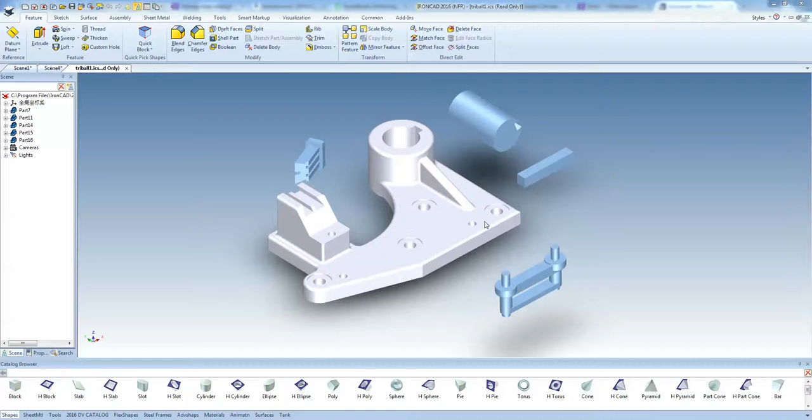In this short video example, we're going to demonstrate how to use the TriBall to align components. On our first part, we'll go ahead and left click once and use F10 to activate the TriBall. You can see that the TriBall is located in the center of the cylinder.

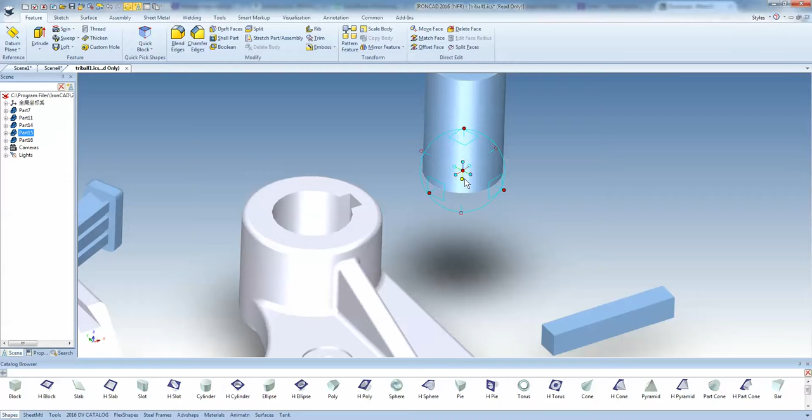A couple different options that we have. By left click and holding and snapping to an axis, I can automatically align to an axis. Now holding down the shift key, I can left hold and drag and snap to the center of that cylinder, and you can see we align right with the center of the cylinder.

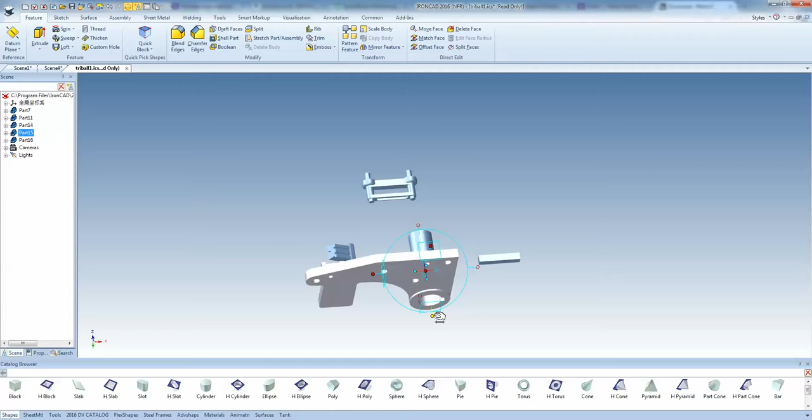Again, by left hold and drag, I can left hold and drag the center of the TriBall inside handle. I can snap to the midpoint of the edge and quickly align the two slots. Again, to align the bottom, I can very quickly just left click that axis, left click, hold and drag, snap to that face, and we've aligned the face of the cylinder with the bottom.

Now for our key stock, we can go ahead left click once, F10 to activate the TriBall. Likewise, the inside handle, which is aligned with the orientation of the key stock, I can left hold and drag, snap to the axis of the cylinder and align quickly with the axis of the cylinder.

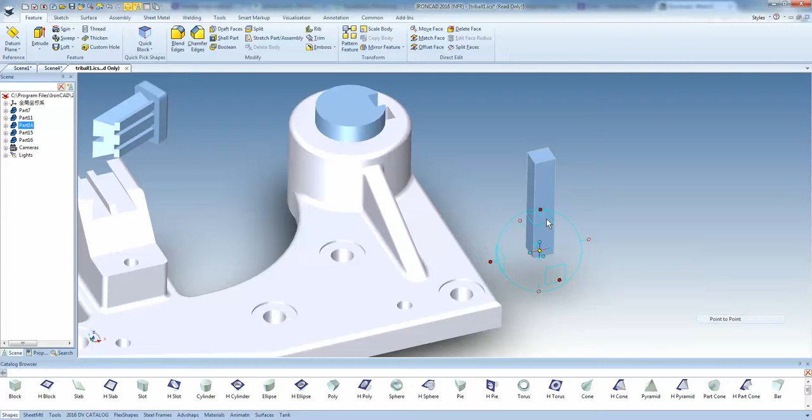Now by right clicking inside the TriBall, I can right click and go to midpoint, point to point. I can click the midpoint of those two midpoint edges there, left click that axis, left click and drag, and again I'm lined up with the bottom of my part.

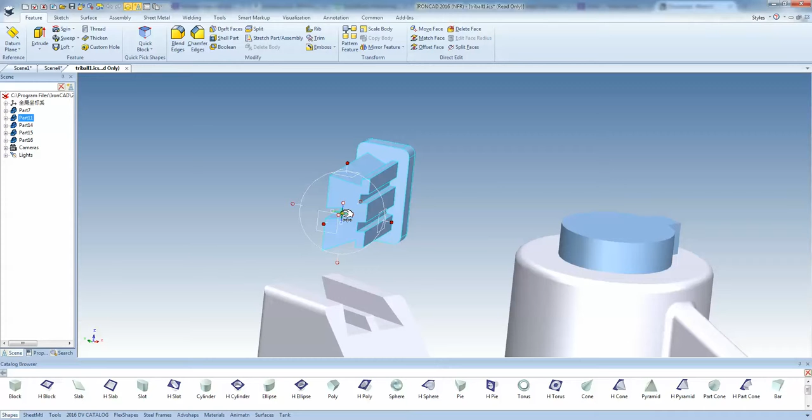On this piece here, we can go ahead and click it, F10 to activate the TriBall. What I want to do in this case is I want to reposition the TriBall. So by hitting the space bar, my TriBall turns white so I can reposition. I'm going to left click and drag to the midpoint of this edge here, hit my space bar one more time, left click and drag to that midpoint, and by grabbing the inside handle, snapping to that face, I can align to the face there.

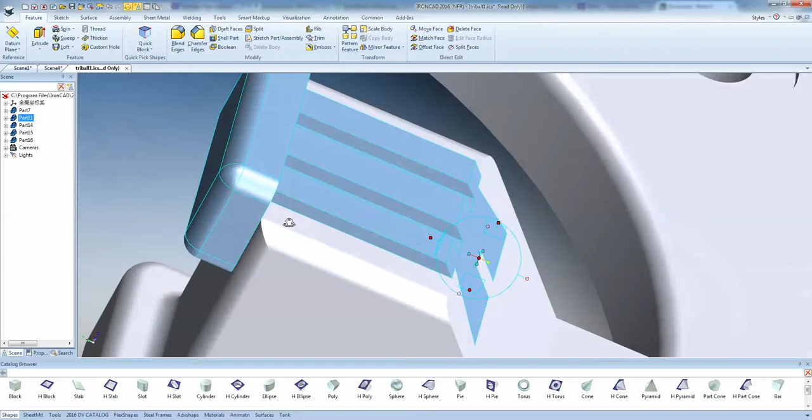And again, my inside handles, which are used for orientation, since this is aligned with the part, I can left click and drag and snap very quickly to align that part.

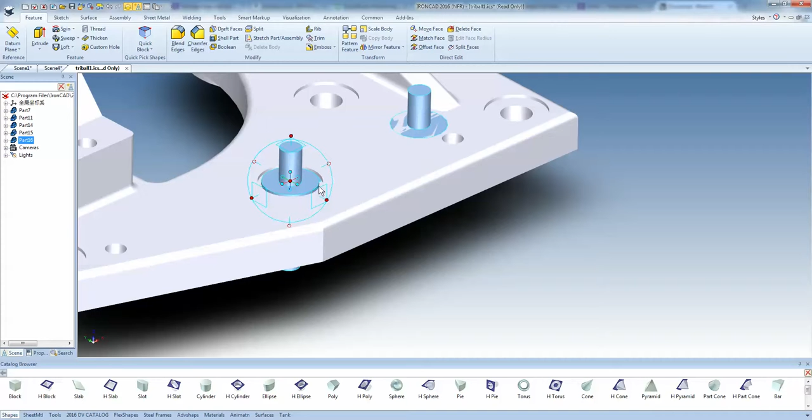For our final piece, we'll left click, we'll activate the TriBall again. I want to reposition, so I'm going to hit my space bar, holding the shift key down. I'm going to snap to the edge of my profile. You'll see it snaps right to the center point. Hitting the space bar again, I can now left click and drag, holding down the shift key, snap right to the center there. By locking this axis, I can now left click and drag.

You can see my handle inside. I'll get an option for my degrees. I can type in 180 degrees very quickly. Unlock that axis. I can right click inside this handle also and go to center point and very quickly align to the center point of that cylinder. So you can see very quickly with the TriBall we can reposition components without the need for constraints and positioning tools.